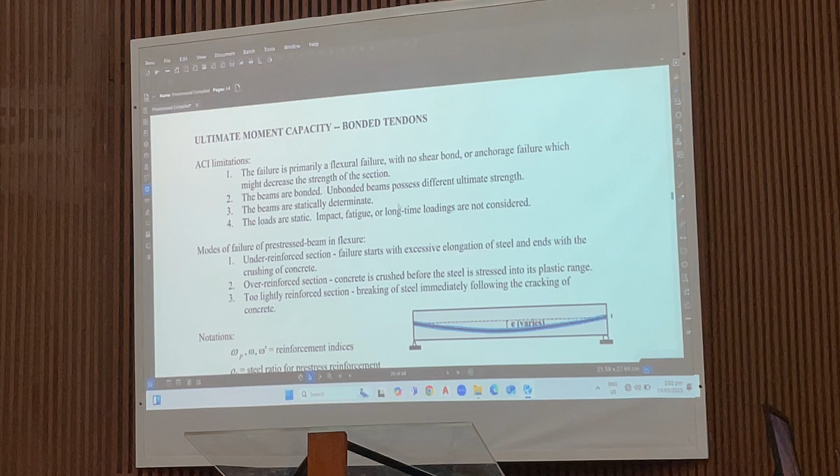So there are two sets of formulas - one for bonded tendon and the other for unbonded tendon. Bonded tendon is being discussed in this part of the notes. For unbonded, we will consider that later. So there are so many differences between bonded or unbonded.

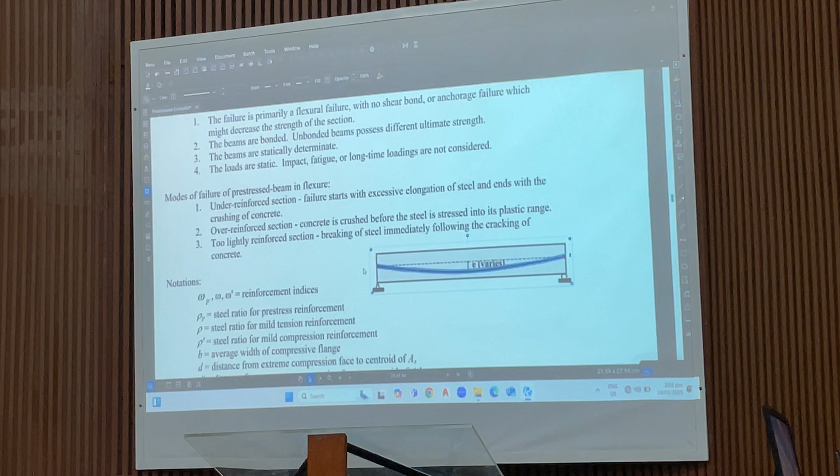Now, to construct a prestressed beam, usually you have the cable duct, so it is laid within the beam. Prior to pouring concrete, the cable duct is laid, then the cable is inserted, but the cable is still loose. The concrete is being poured. When concrete hardens, that's the time we apply the prestressing force. We done that already, then we lock the end of the tendon, and that will transfer the force to the beam.

So this is our cable duct, and here is our tendon. So one cable duct can accommodate more than one tendon - you can have more than one tendon in a cable duct.

So if the space in between is grouted - simple, we have these ports here. A hose is embedded along the duct, that is for injecting the grout. Usually the hose is on one end and we pressurize the grouting to push the grout inside the duct. And we will know that it is already filled with grout, because the grout will spill over the other end. So once it is grouted, that means that there is bond between the tendon and the beam.

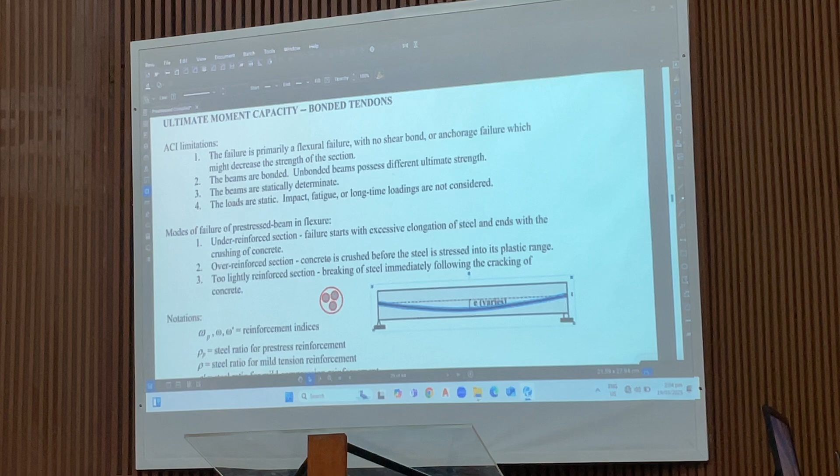So the formulas that are given here are subject to the following limitations. Number one, the failure is primarily a flexural failure with no shear, bond, or anchorage failure, which might decrease the strength of the section. Meaning the flexural failure is yielding of the steel or crushing of concrete.

And second, the beam is bonded - an unbonded beam possesses different ultimate strength. Third, the beam is statically determinate. A statically indeterminate beam will have a different behavior, and is covered in another chapter.

Then fourth, the loads are static, so impact, fatigue, or long-time loadings are not considered.

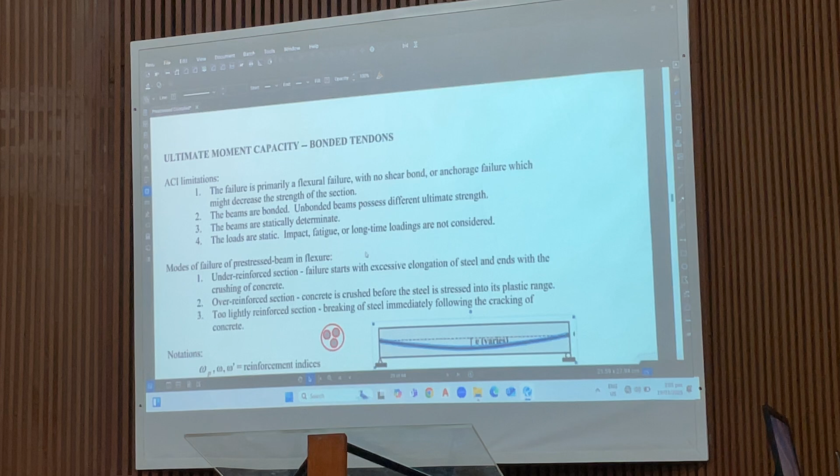So there are three possible modes of failure for a prestressed beam. First, you have the under-reinforced condition. The under-reinforced failure will be initiated by yielding of steel, which will later be accompanied by crushing of concrete as the neutral axis shifts or moves upward.

Then second, you have the over-reinforced section. Over-reinforced failure will be initiated by crushing of concrete first, before the steel is stressed into its plastic range. The third mode of failure is a too lightly reinforced section, so breakage of steel immediately following the cracking of concrete.

Now, to avoid the third condition, the code specifies a minimum amount of steel reinforcement, whether bonded or unbonded. And between under-reinforced or over-reinforced, the ideal is under-reinforced, because if the beam will fail, the failure should be initiated by yielding of steel rather than by crushing of concrete.

Because yielding failure is slow failure, therefore we provide impending warning of the impending collapse. Whereas the over-reinforced section, which will fail primarily by crushing of concrete, will result in sudden brittle failure.

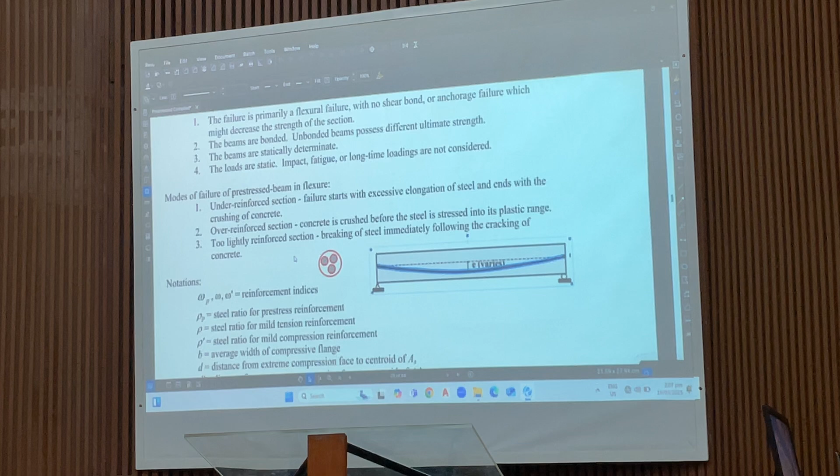So in the formulas that will be used in subsequent discussion, these are our notations. With subscript P, that refers to the prestress reinforcement, or the strands or tendon. If there is no subscript P, then this refers to the mild steel tension reinforcement.

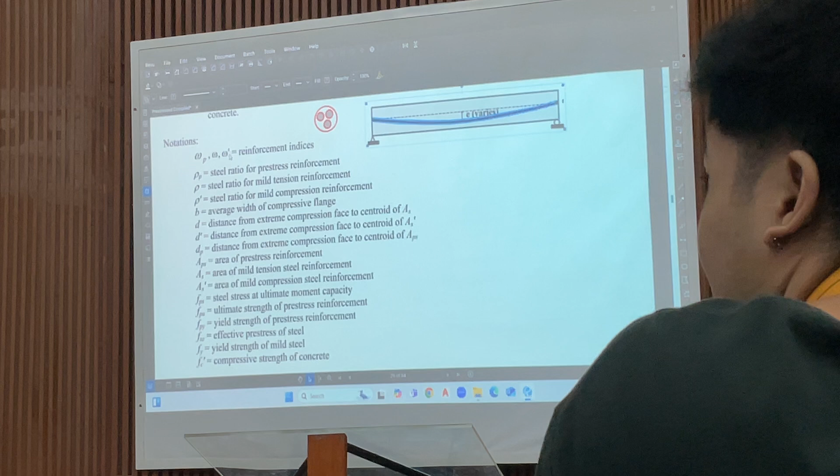With the prime symbol, that refers to the mild steel compression reinforcement. So rho sub P is the steel ratio for prestress reinforcement, rho is the steel ratio for mild tension reinforcement, and rho prime is the steel ratio for mild compression reinforcement.

So it's possible for our prestress beam to have compression reinforcement here, and it's also possible to have mild steel tension reinforcement on the tension side. These are usually provided in order to counter initial high tensile stress and even compressive stress during the time of initial stress.

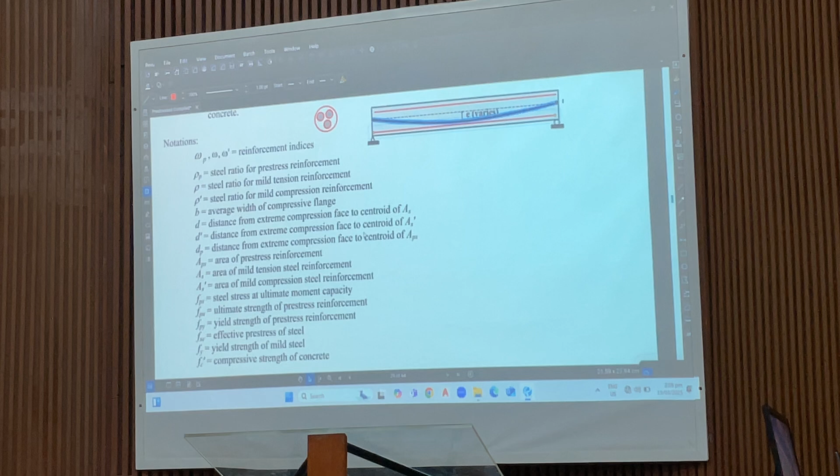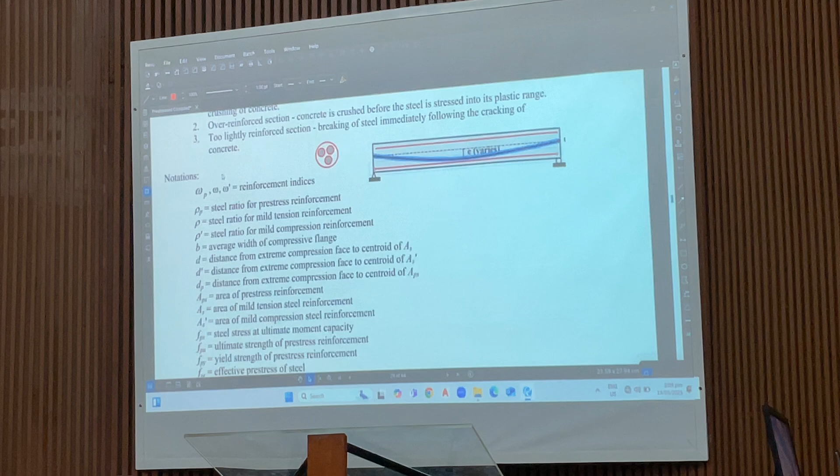So to summarize how to read this: the subscript P frequently refers to prestress reinforcement. Without it, it refers to tension mild steel, and with the prime, compression mild steel. So, ensure yielding of steel, which is condition one, which is the desired condition.

The code specifies a limit on omega sub P, which is equal to rho sub P times FPS over F sub C prime, not to exceed 0.36 of beta 1. Rho sub P is the steel reinforcement ratio for the pre-stress reinforcement, obtained by dividing the area of the pre-stress reinforcement by b times dP, where b is the width of the beam and dP is the distance from the compression face to the centroid of the pre-stress reinforcement. Beta 1 is the compression block equivalent factor.

The formula is as follows: if F sub C prime is less than 30, beta 1 is 0.85. If F sub C prime is greater than 30, beta 1 follows a linear equation formula: 0.85 minus 0.008 times the quantity F sub C prime minus 30, but not less than 0.65.

If ordinary reinforcing wires are used together with pre-stressing steel, for example there is mild steel tension reinforcement and mild steel compression reinforcement, then the reinforcement index is modified. You add the tension reinforcement index and subtract the compression reinforcement index, and the sum of these three should not exceed 0.36 beta 1.

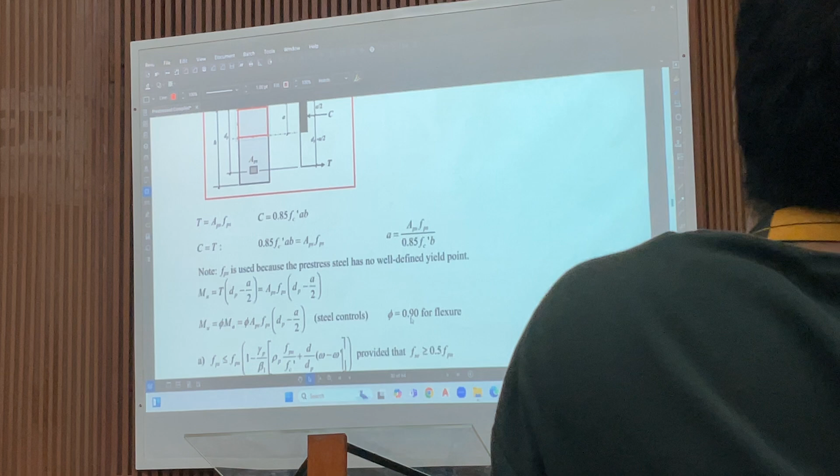So it's simply about the range now, for the transition formula.

As regards the stress in steel, which you use to compute the ultimate moment capacity, we look at the formula for FPS, which takes into account the tension steel reinforcement and the compression steel reinforcement. So you have FPS, FPY, and the third one, FPS should not exceed Fse plus 400 MPa.

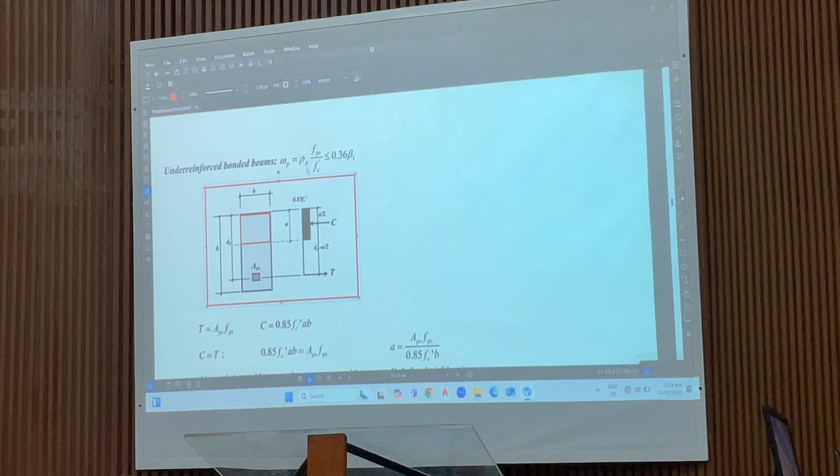Ikunan na lang, no? So, pili kayo result, di ba? Okay, mo naman i-test. Ito din ang reinforcement index. If it is less than 0.36 beta 1, then under-reinforced. If greater than or equal to, then over-reinforced. So duha ra kagiyanan.

Now, for non-rectangular section, the analysis will be the same as sa katong T-beam, no? Sa reinforced concrete, kanang irregular na compression area, you just divide that into component rectangles. And you can break up the internal moment into parts, no?

So, dire kung panglitan na ay section, yun na dire nga itong kung siya depth sa atong compression block. So, ang atong compression area will be irregular. Kanang irregular ka area, ato na siya i-divide, no? Into this, in yung middle na rectangle.

Then, the remaining, ato na lang dito sa pag-ihap kay they are located at the same distance from the moment arm, no? Yung nabahin na rin mo. In fact, ang isang principle will be or can be applied for other non-rectangular section. Nakalitan nakakuha tayo mga section na rin nito kayo, di ba? Gawa sa atong problem set, ito na itong ganaw.

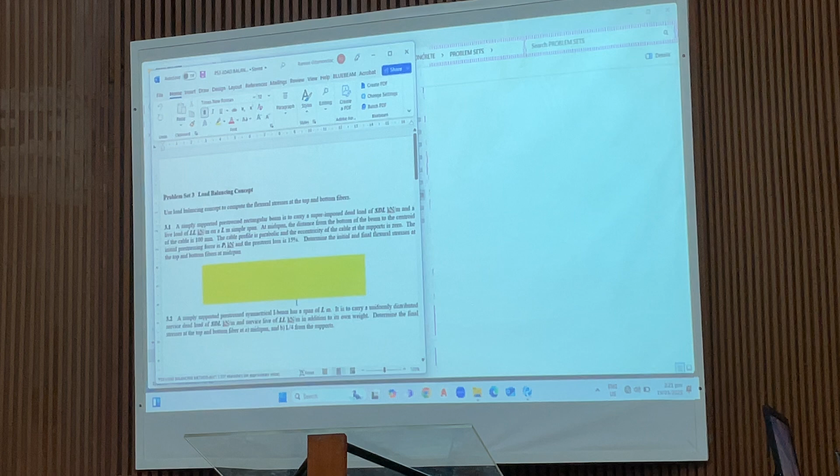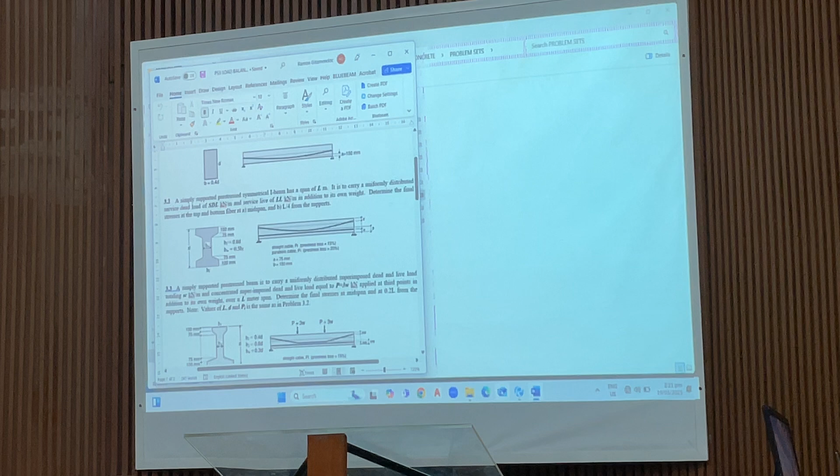So, marami tayo muna niyang section, di ba? And pag-solve na ito sa A, gawas na nasiya na kita rin. So, ang atong compression area, hindi siya rin, no? And that is irregular. So, ang inyong bato, i-divide na lang yung component rectangle o triangle. Ito rin. So, naka-part niya.

And another part will be meaning ng mga rectangle sa gilid. Pwede rin usahon na ito, no? Usahon pag-ihap. O, tulog yung gilid ng triangular area. Of course, we know the centroid of rectangles and triangles.

So, kita po na, kung inunin kay katulong component na rin. Diba? Ang primerong component parang ini sa kaning rectangle. May component na. And for the two rectangles on the sides, then for the two triangles, rin, no? Puro ka component. Okay? So, mao na siya ang principles sa mga non-rectangular section.

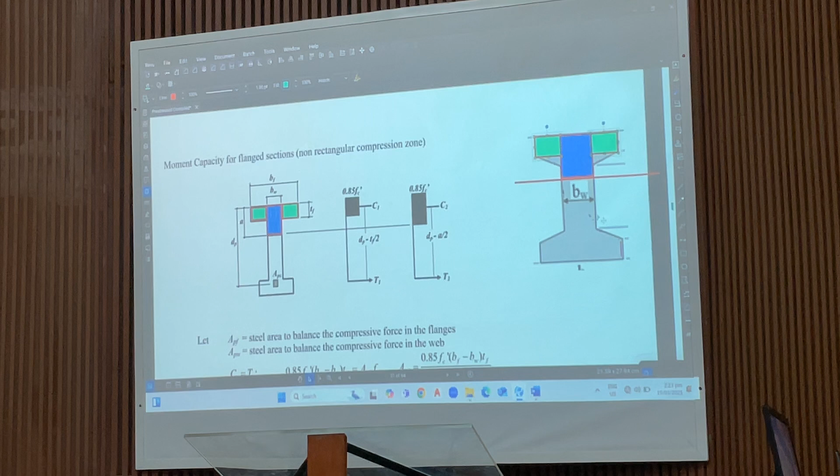So, nag-giring sa tension side, kung tayo muna siya mo water niya, kay ultimate load is sides assume crack already. Okay, so APF, that is the area of steel that will counteract the compressive force developed in the flange, which is C1. And APW, that is the steel area to balance the compressive force in the web, the blue rectangle. Ganun siya, aquaris niliginig. Ang ganun green, aquaris niliginig siya.

Okay, so equilibrium requires C1 is equal to T1. And ang atong C1 will be the average compressive stress in concrete, which is 0.85 FC prime, multiplied by this width plus this width here, that would be BF minus BW, then multiplied by the thickness TF, gives you the area. Then T1 will be equal to APF times FPS. So, giga na yun, masolve na ito ang APF.

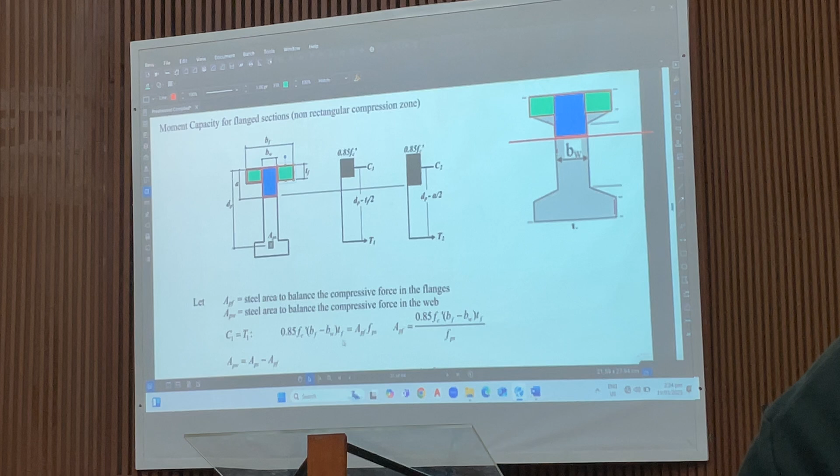Then, masolve ang APF, masolve na sa na ito ang APW, no? From the relation total area APS is equal to APF plus APW, no? Therefore, APW is equal to APS minus APF. Ang area ng quadrate, no? Plus area ng quadrate, that should be equal to total area, no? APS.

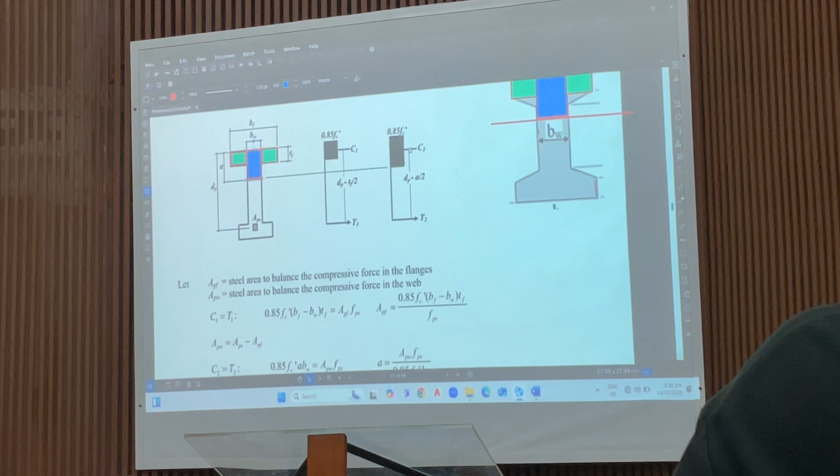And for this stress diagram, again, equate C2 to T2, and C2 is equal to 0.85 FC prime times A times BW, which is this area, no? So, A ang depth niya, BW ang width, and equal to APW times FPS. So, ganyan din, masolve na ito ang A. So, kumanin mo masolve ang A, matitin sa mo ang moment, no? Before magkaroon, so you know the moment arm of the internal component.

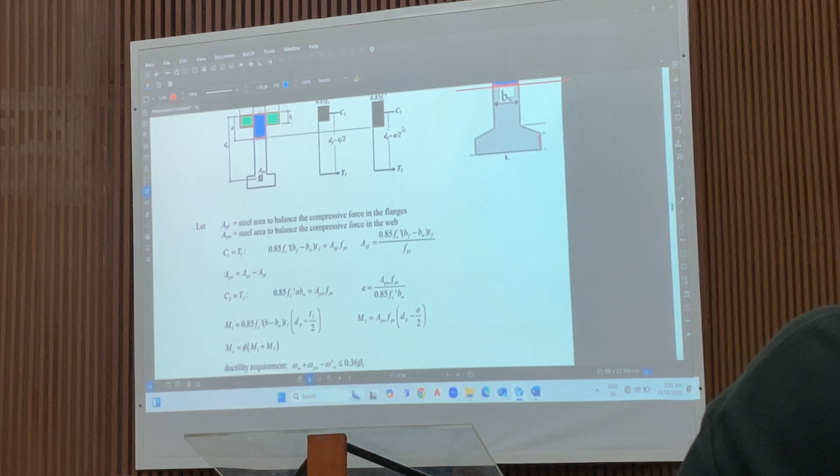Okay. So, for the first stress diagram, the moment will be C1 or T1 multiplied by dP minus TF over 2. Ganito rin stress diagram, ang moment will be either T2 or C2 multiplied by the moment arm dP minus A over 2. Okay? Kaya yan mo, that will be your total resisting moment, then multiply by the strength reduction factor.

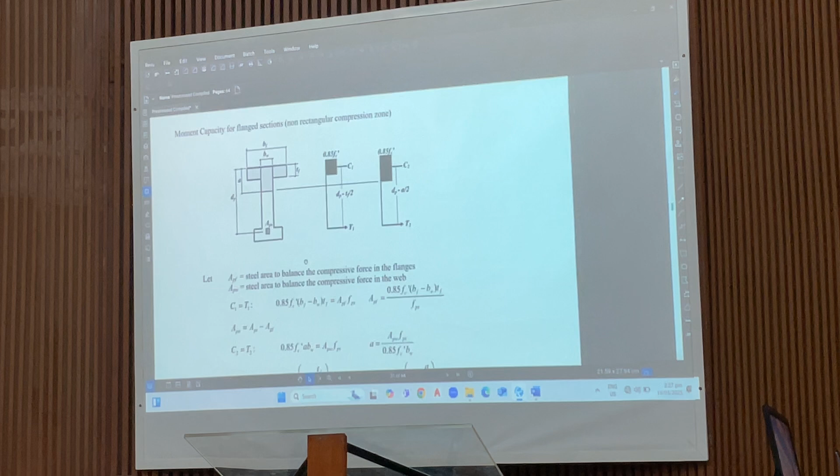Determine the ultimate moment capacity of the pre-tensioned beam with a cross-section of 300 by 700 mm. Concrete has 35 megapascal, and stress-relieved prestressing strand is FPU or 1750 megapascal, APS is 1500 square millimeter, with an eccentricity of 200 millimeter below the centroid. Assume the strands are stressed to 0.7 FPU at transfer, with 20% prestress loss.

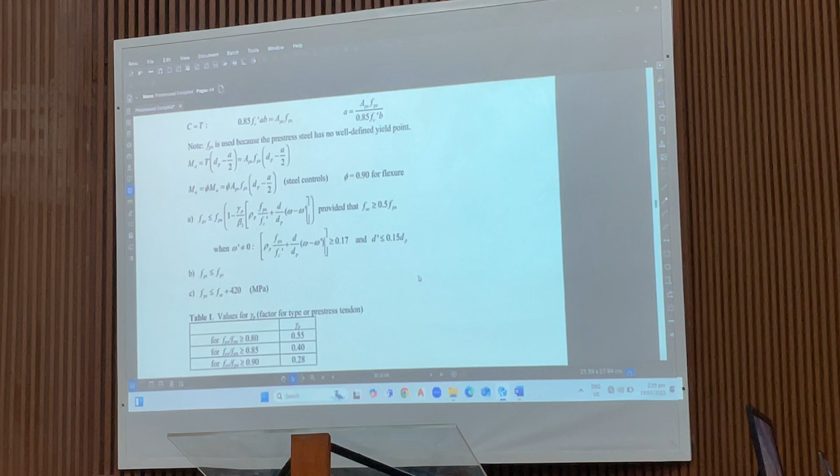So you have a 300 by 700 cross-section, the location of the tendon is 200 mm below the centroid.

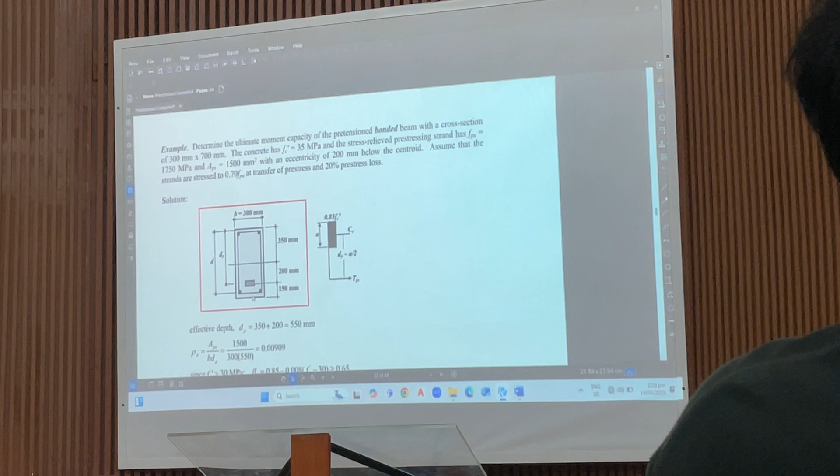When computing the ultimate moment capacity, you can include the contribution of the mild steel reinforcement.

Beside the cross-section, we also draw the stress diagram. It is always good to visualize the stress diagram.

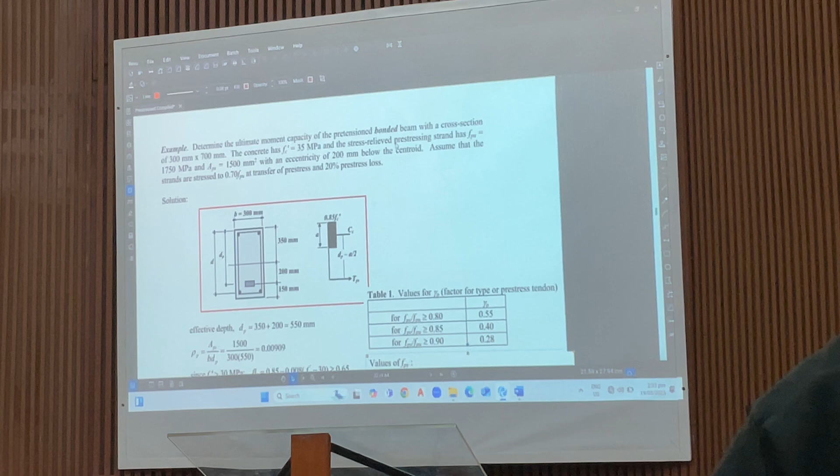Therefore we use 0.85 FPU.

So if FPY is equal to 0.85 FPU, that gives us the ratio FPY over FPU equal to 0.85. If equal to 0.85, then we have gamma P equal to 0.4.

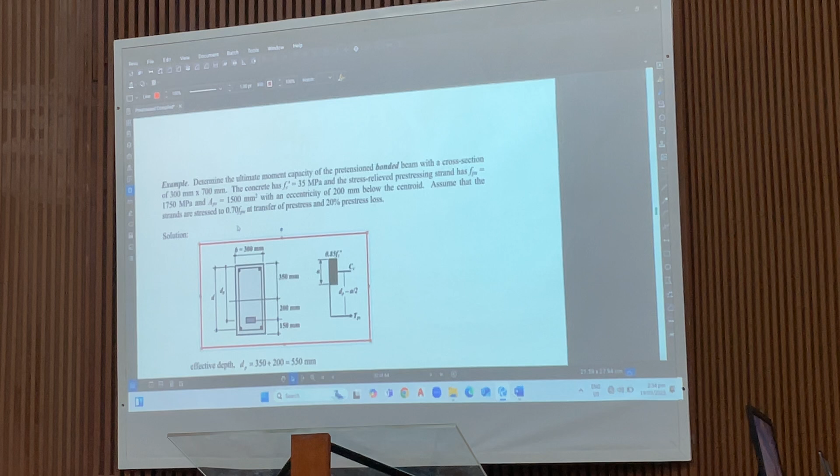We get 1225 megapascal. Then for effective stress, we consider the prestress loss of 20%. So the initial 1225, with a 20% loss, you just multiply this by 0.8, since 1 minus 0.2 equals 0.8. So we get 980 megapascal - that is our FSE.

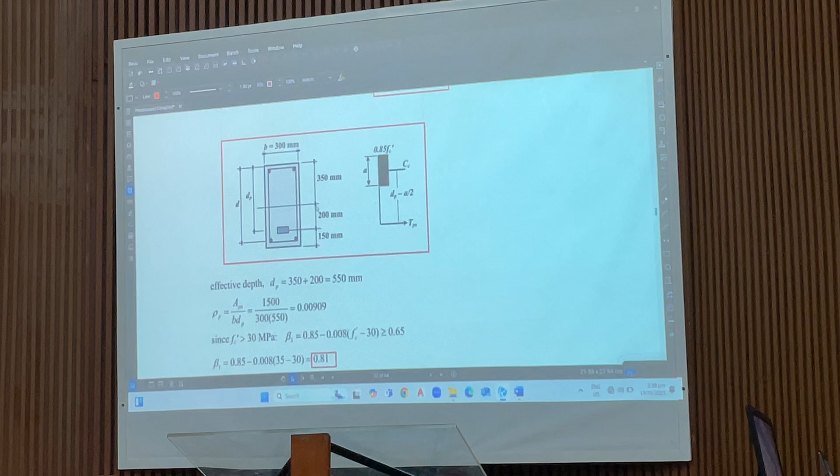So we get A. Now that we have A, we go to dp minus A over 2 - this is the moment arm of the internal couple. 0.85 F sub c prime times A times B is the resultant compressive force, and phi is your capacity reduction factor.

Substituting the values, we get an answer of 681.5 kilonewton-meter. Now of course, you might ask, doesn't this govern?

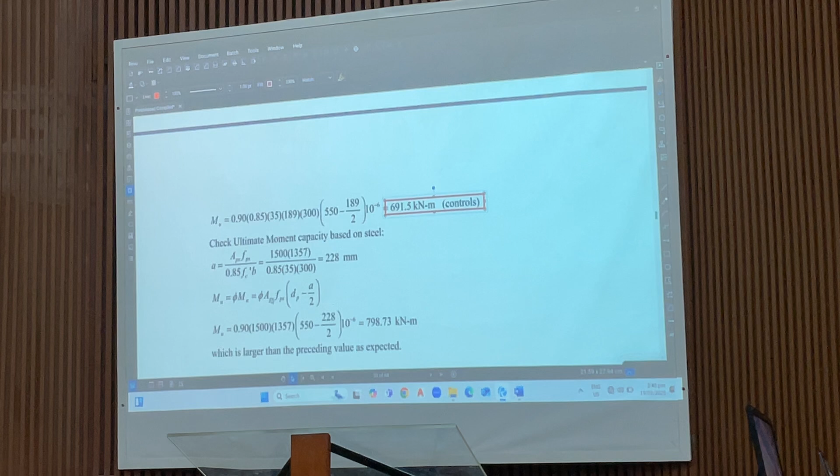But just for the sake of comparison, let's compute also the moment capacity based on steel. Using this formula for A, we get 228 millimeter, and the ultimate moment based on steel - its capacity is actually quite high compared to concrete. So concrete will fail first.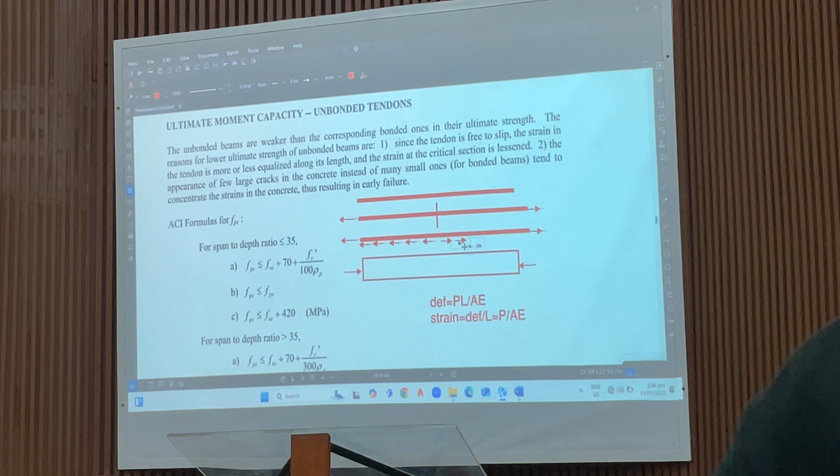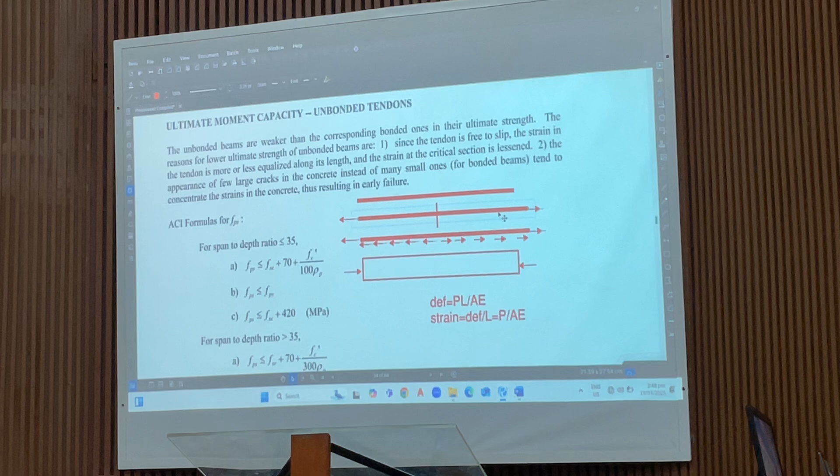So yung bond stress relay along the cable and the strain in the cable will not be equal. So how do you compute the strain? Kita compute ang strain na rin. Hindi mo pilay P, kaya P mo bari man. So wala ka, ang hindi ng free body.

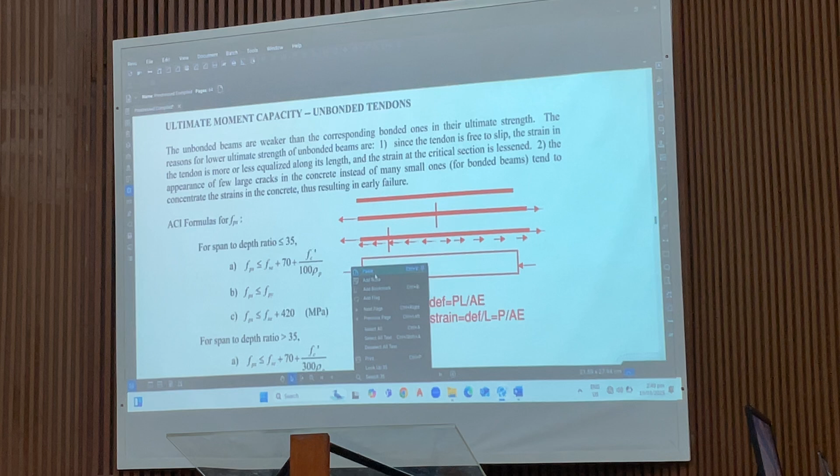Kasi yung free body diagram, no? Of course, di mo i-balance yung siya operate. Ay, force din, no? So wala siyang force na mag-act niya lang ng barge cable.

Okay, i-apply din mo sa imong formula na sa P over AE. Ang area mo gihapon, ang E mo gihapon, pero ang P mo bari. Para sa bonded, where P is constant along the cable. For unbonded, it will vary.

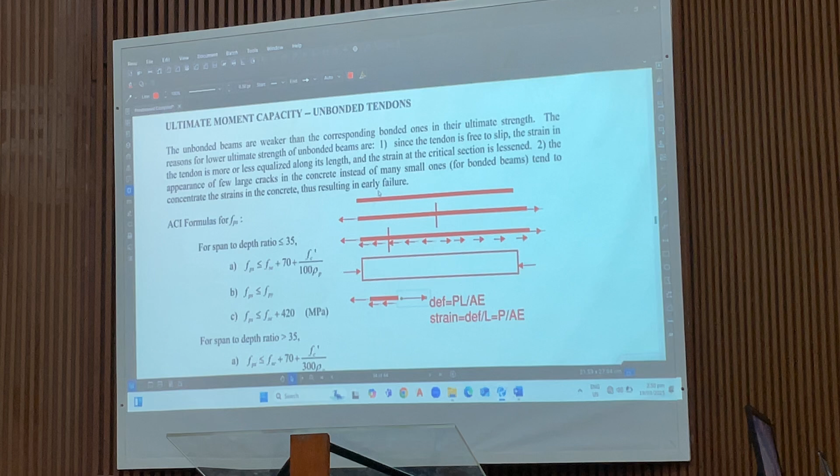Now, economic reason: the appearance of few large cracks in the concrete instead of many small ones for bonded beams tends to concentrate the strains of the concrete, thus resulting in early failure. So sa bonded na beam, ang mga tension crack mo, daghan pero gagmay. Daghan nga ino siya, ino ng mga cracks. Whereas ang unbonded, medyo jutay na siya pero dagko.

So asa may mas delikado, ang daghan nga gagmay na crack o jutay ginaganon pero dagko ka crack? Gagmay na lang, mahalaga gagmay. Mahalaga gagmay lang.

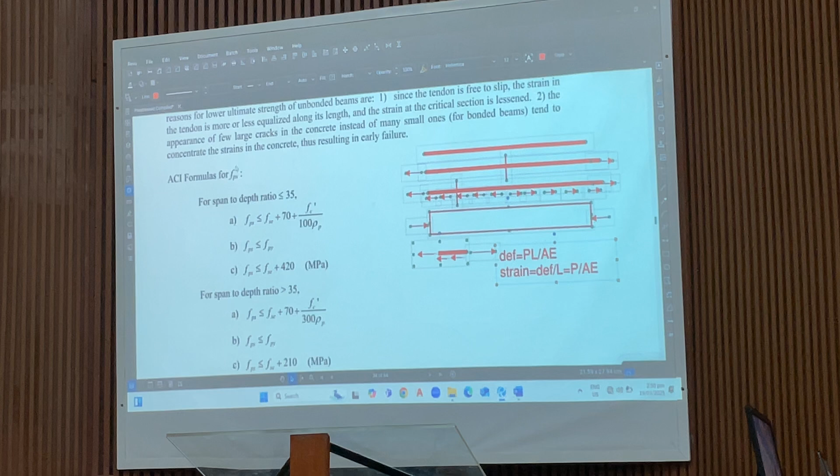Okay, so pag determine na ito sa FPS, doon ay duha ka set of formula sa ACI. Depende sa span to depth ratio. Kung less than or equal to 35, mo na siya ang formula na i-verify. Kung greater than 35, ako sa laing mga formula na i-verify. Okay, so may difference rin ang formula.

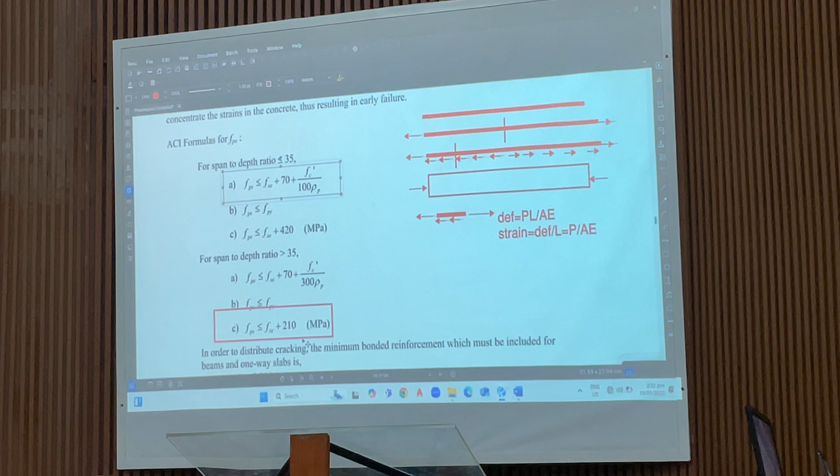Yun na ang mga set of formula niya. Tungod in order to avoid any large crack, ang code require na putagan na itong minimum ng bonded reinforcement. Okay, we have to provide minimum bonded reinforcement.

So the area will be 0.4% of A. So kaning A, sa manay, ini siya cross-sectional area sa imong B. So kaning A is the area of the part, the cross-section between flexural tension face and the centroid of the cross-section.

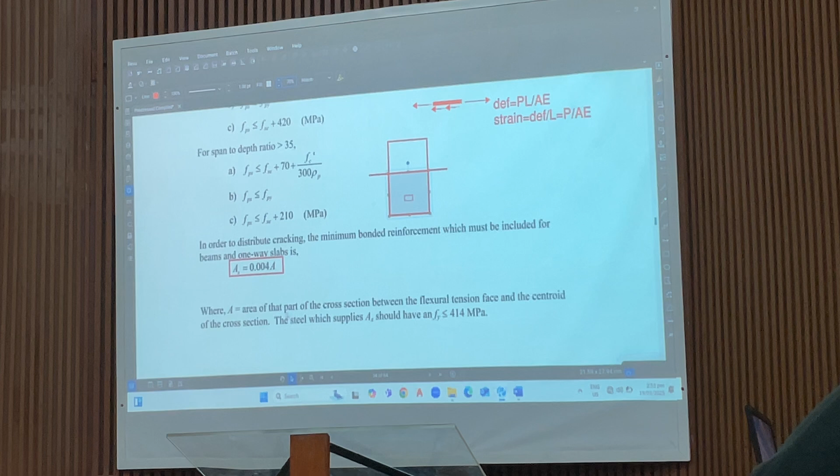Kanali, muna yung atong cross-section. Dali yung atong ibol. Atong centroid na dali. So ang area, kanira na area. Kaya siya, dili ang interior area. Area of the part of the cross-section between the flexural tension face - so this is the flexural tension face - and the centroid, this is the centroid, or the neutral axis.

So steel which supplies AS should have a yield strength not exceeding 414 megapascal.

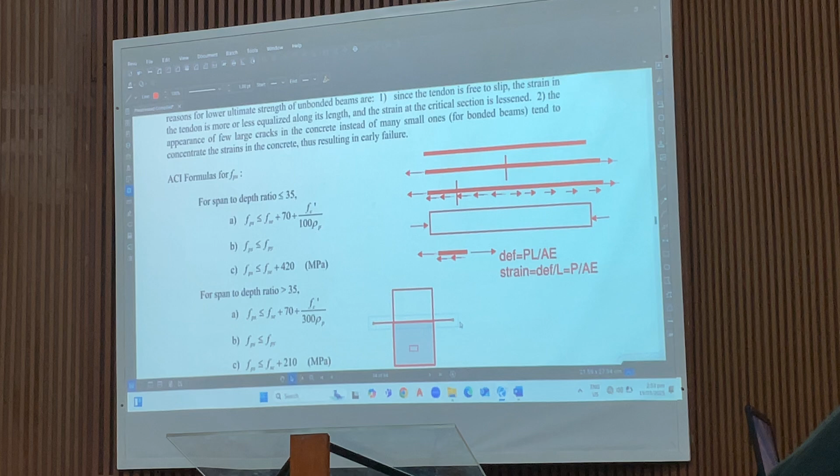Okay, so ang sunod, example na rin, maghiharag yapon na cross-section, 700, 55, maghiharag yapon na data. But this time, the beam is unbonded. So again, we compute dP, maghiharag sa kanya, then we have to compute now the span to depth ratio. So span of the beam is 12 meters.

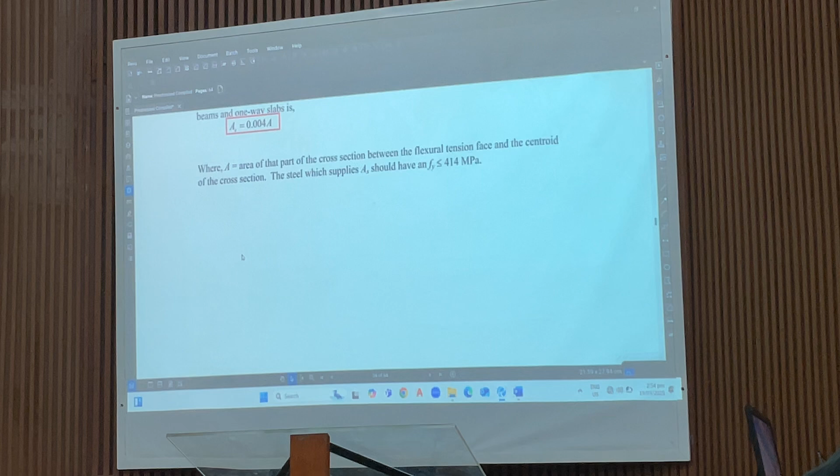Sa previous example, wala nag-specify, no? 12 meters ang span, wala. Pero kinahanglan nato ang kanang information for the unbonded. So nag-ilugang na rin 12 meters ang span. So this is the span, and this is the depth.

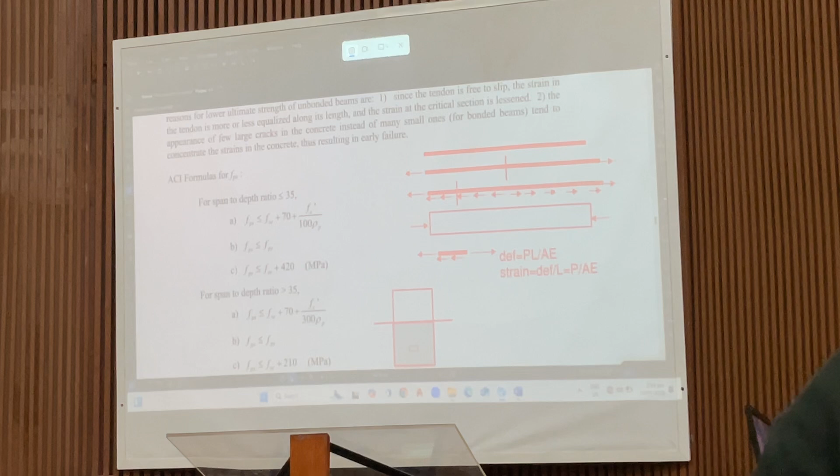So we get 17.1, less than 35, and therefore, for solving FPS, we will use this set of formulas. Yeah, it's the 35 man.

So ini ang formula, kinalata sa rho sub P. Ito na i-complete rin rho sub P. So APS over BDP, ito na rin nag-complete kaniya. Maurag yung mga answer, di ba? Wala na rin, no? So ito. Ini. Copy-paste.

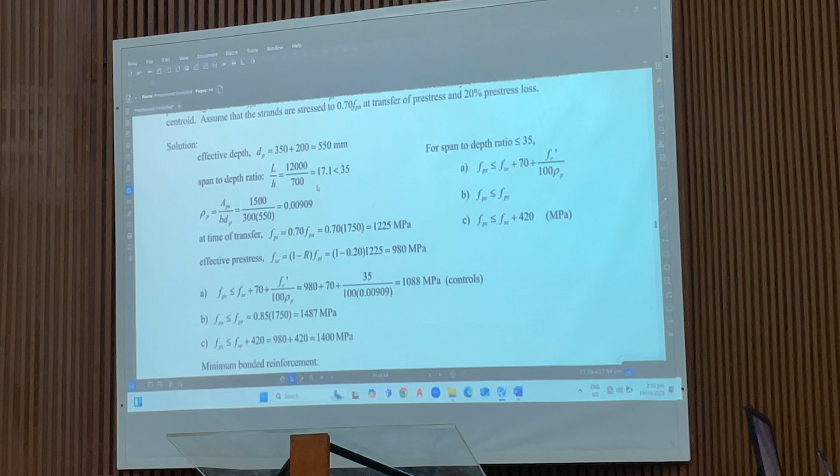So at time of transfer, 0.7 FPU, 1225 effective pre-stress, multiply by 0.8, assuming 20% loss. So 980, this was computed previously. After having computed those quantities, we are now ready to compute FPS. Option A is the formula, option B, option C. So these are our results: 1088, 1487, and 1400. The smallest value is 1088 megapascal.

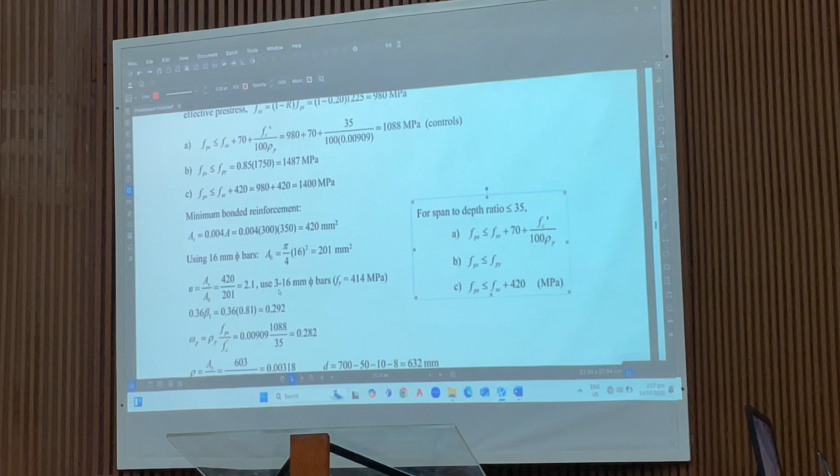So for this one, below we use 16 mm diameter bar with FY 414 megapascal.

Okay, next we compute the limit, 0.36 beta 1. This is already computed. So now we compute the reinforcement index for the pre-stress reinforcement, following the same approach. But in addition to that, we also need to compute the reinforcement index for the mild tension reinforcement.

Before we can compute omega, we need to compute rho. So rho will be AS over BD, where AS is the area of your mild tension reinforcement. So the area for a 16mm bar is about 201, times 3 gives 603. Okay.

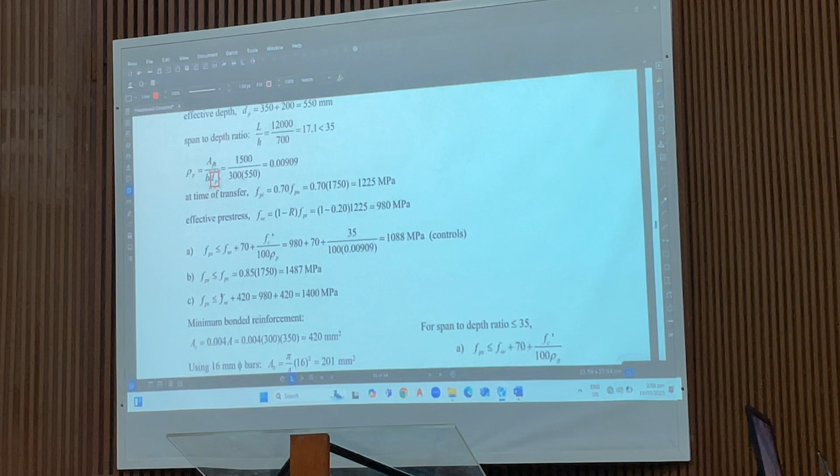Let's check this computation: 700 is the depth, minus 50 - that's the clear cover - minus 10, which is the stirrup, assuming a 10mm stirrup for this problem. Then minus 8, which doesn't have to exactly be 8 - it could be 4 plus 4, or 6 plus 2 - that's half the bar diameter to the center. Since we used 16mm bar, half of that is 8.

Okay, so 632 here. Now we can solve for rho, then solve for omega. You get 0.038, then you can now compute the total reinforcement index, which is omega plus omega p minus omega prime. We don't have omega prime yet, so it's zero, and we get 0.32, which is still greater than 0.292 - compression controls.

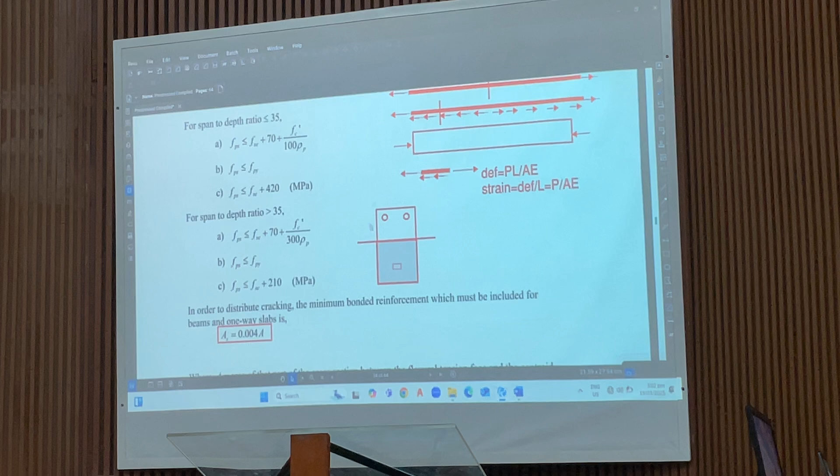So, to determine how much is needed, you redesign using the earlier formula where R is less than 0.292. You make it smaller by subtracting omega prime. As you add omega prime, R becomes smaller. So we can determine the value of omega prime needed to make R equal to 0.292, or at least slightly lower. If you back-calculate this, you get omega plus omega p minus omega prime.

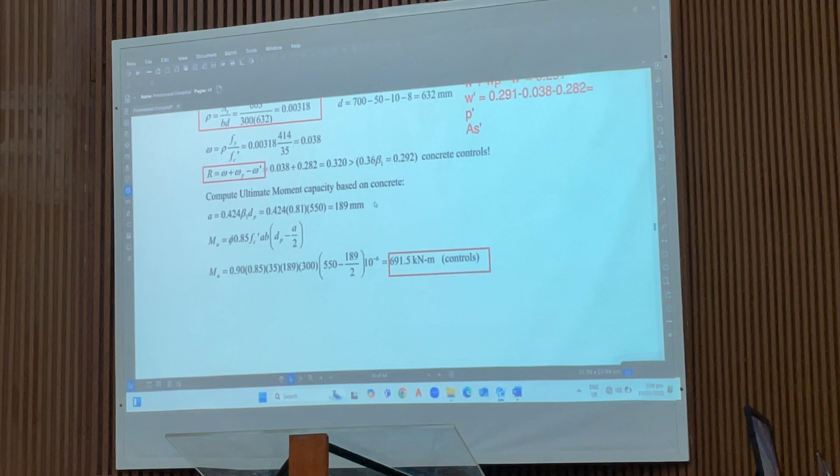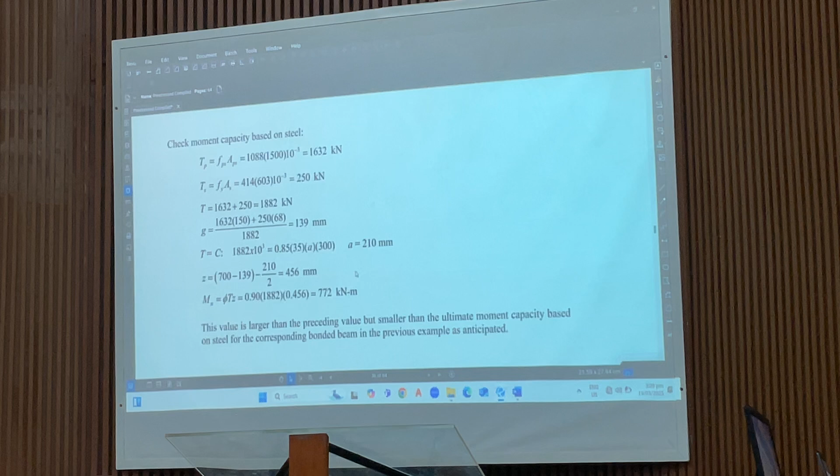In order also to show how to deal with this situation.

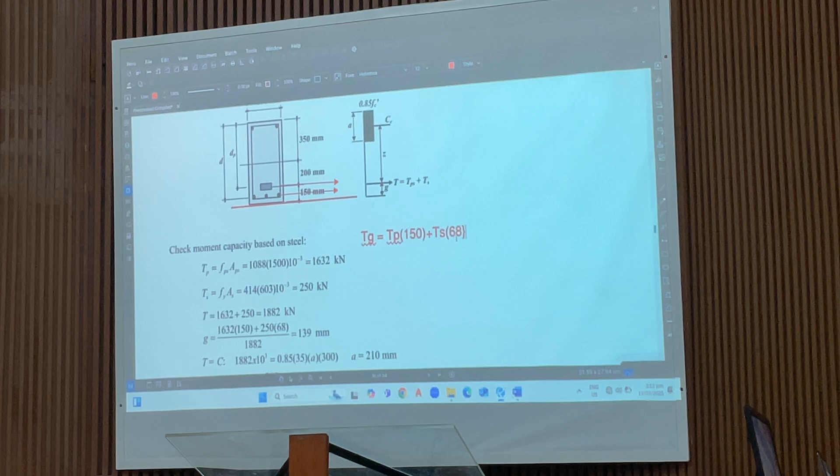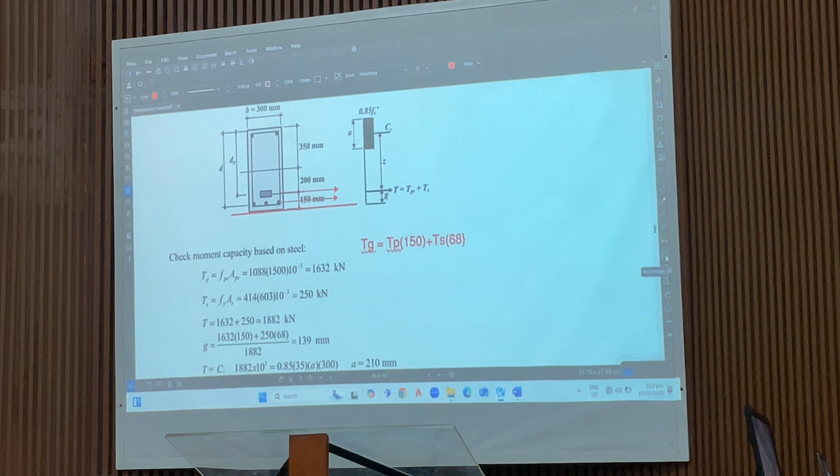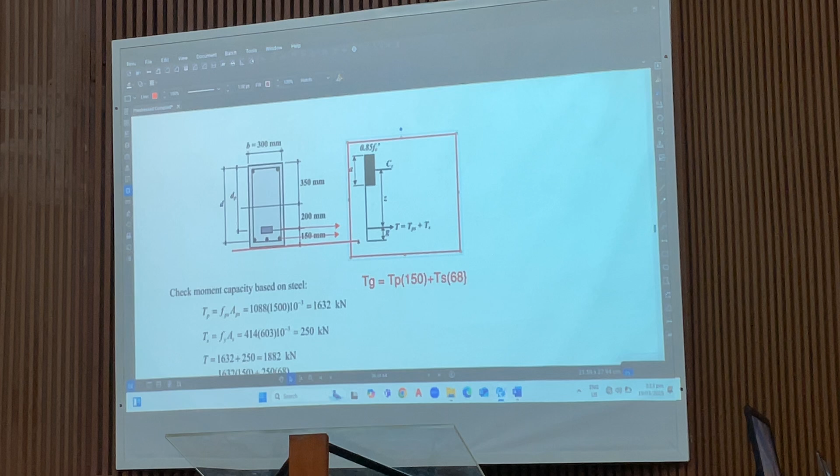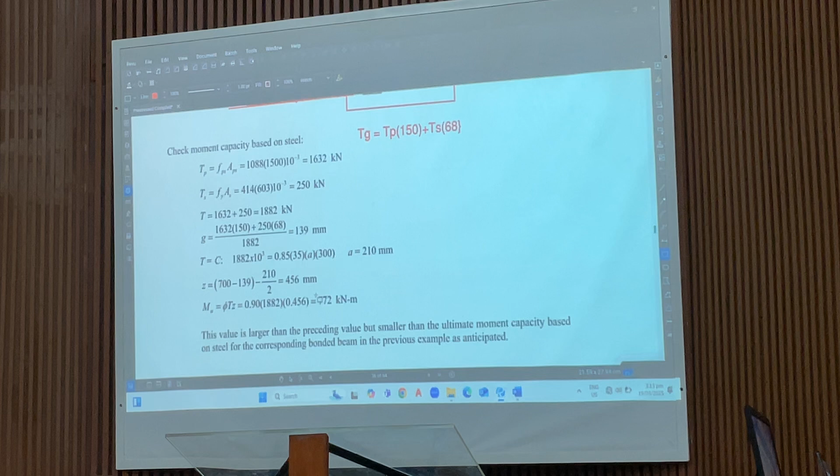Having replaced these two tensions by a single tension, then we already have the stress diagram. Equating this to T, you get your A. Then the moment of the internal couple will be equal to what? This is all for Z, the depth of the beam, so 700 minus G minus A over 2. Z, and the moment will be T times Z. So T is the force, Z is the moment arm, then multiplied by the capacity reduction factor. Here we get an answer of 772, which is greater than the previously computed 691.